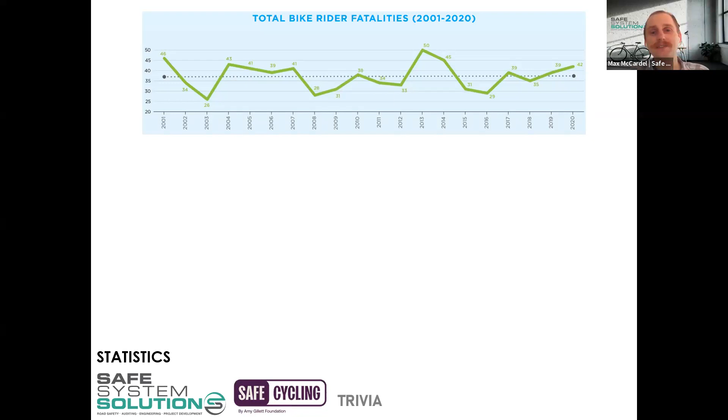This is just showing how the fatal trauma for cyclists, riders, has been performing over the last two decades, so the last 20 years. And we can see that there has been a bit of a cyclical up and down, but that dotted line represents the trend line. And you can see it's relatively flat. So there's not a significant amount of movement.

Over the last 20 years, we've basically been seeing 40 or so cyclists killed on the road network every year across Australia. And that's been pretty consistent, which is pretty disappointing to hear. If we compare that to how we're tracking with vehicle fatalities, in the last 20 years we've certainly seen lots of investment in road safety programs across our jurisdictions. And we have seen lots and lots of benefits with our reductions in trauma for passenger vehicles,

so for those that are driving cars. If we do this as a measure of the actual population size as well, we do see that for rider fatalities, or those people riding a bike, there is a downward trend there, but it's not as steep as what we're seeing for vehicle fatalities. So in other words, yes, as a percentage of the population, rider fatalities are decreasing, but not to the same extent as we are seeing for vehicle crashes.

So there's certainly some work to be done within that space to see greater parity between those two road users, and hopefully seeing much better numbers, so we're not just always hovering around that 40 deaths per year for riders.

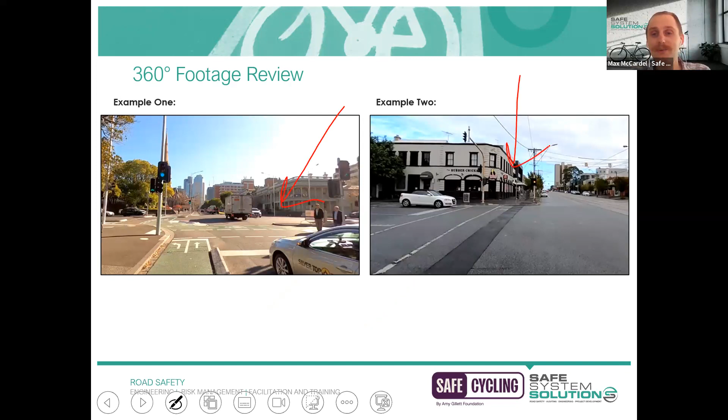Okay, hopefully everyone managed to watch the video footage from our last module where we had a look at the protected intersection, as well as example 2, which was just a conventional intersection and using the hook turn box. Love to hear feedback in the chat.

Today's agenda will very closely follow what we had structured in our previous module. And one of the documents that we do refer to quite often is this guidance on bicycle and pedestrian treatments at roundabouts. It's 2016, so it's a few years ago now, but there's still very relevant findings in there. Lots of good information. And we've also got the bicycle safety at roundabouts, the Austroads research report.

I think I mentioned this in module 1, where if Austroads is commissioning a research report, it tends to show the volume or the significance of that issue. So the fact that they've actually said we need to know more about cycling safety at roundabouts, and they're willing to put X amount of dollars to fund a research project, really exemplifies that there's a pretty significant risk here and something that we can do better within industry.

And one of the ways that we can do better within industry is through the implementation and design of protected roundabouts. I will go into exactly what that looks like and the design elements of a protected roundabout. I'll show some international examples and then have a look at something that's a bit closer to home that would look a bit more familiar, and that's Melbourne's protected roundabout.

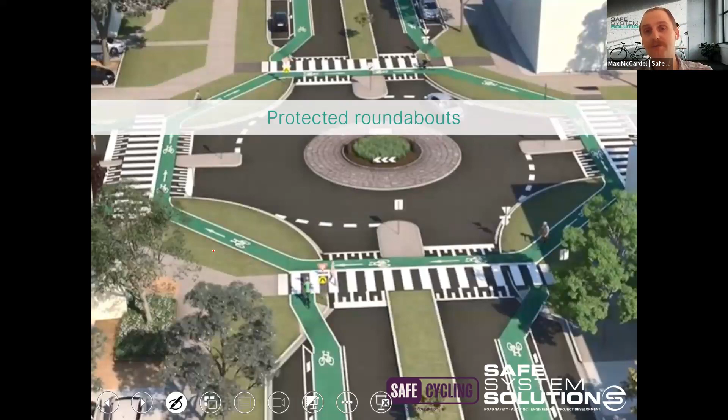Alrighty, so this is an artistic rendition of Melbourne's protected roundabout. And the first thing that you may notice is that the bicycle facility is kept away from the circulating area. So you're not forcing riders to coexist with traffic in the circulating area. One of the really critical components of these protected roundabouts is getting your riders away from that circulating area. And we'll discuss why you would be wanting to do that in just a moment.

The other thing that I really like about Melbourne's protected roundabout, and it's not a requirement of these features, but where the conflict point exists at each leg of the roundabout, they've actually raised those conflict points. So we know that where we've got raised crossing points, we have a much better chance of actually slowing vehicles down and making them yield, making them give way.

If that was just at grade with the circulating area and with the carriageway, and riders had to go down onto that carriageway level, there's a bit of that priority confusion once again, who gives way to who. So really, really good practice to raise all of those legs and award priority to your vulnerable road users, which is your pedestrians and your cyclists. So I'll talk more about this with Melbourne's protected roundabout later on, but just wanted to give you a high-level view of what that one looks like.

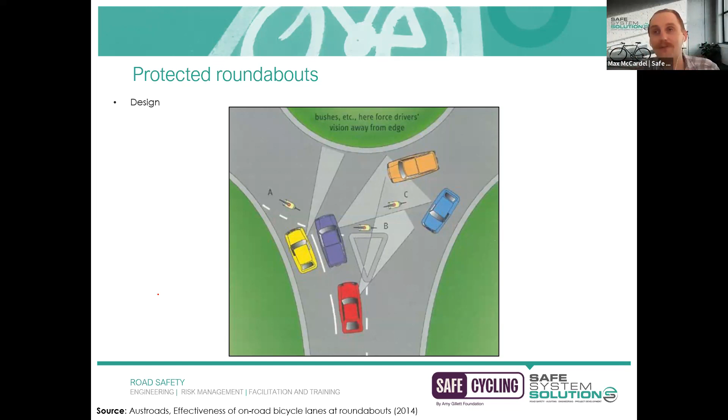A few years ago now, there was an evaluation completed which looked at police crash reports of bicycle crashes within roundabouts and did a bit of an analysis around what the crash types occurring within that roundabout were. So what were the type of movements? Now, this is a bit of a synopsis just to give you the high-level summary of what that evaluation concluded.

So that is exactly what I explained before, that phenomenon where a vehicle may look at a cyclist but fail to register them and just enter the roundabout. And that's where you've got the collision. So quite a significant amount of the trauma is occurring with those types of crashes.

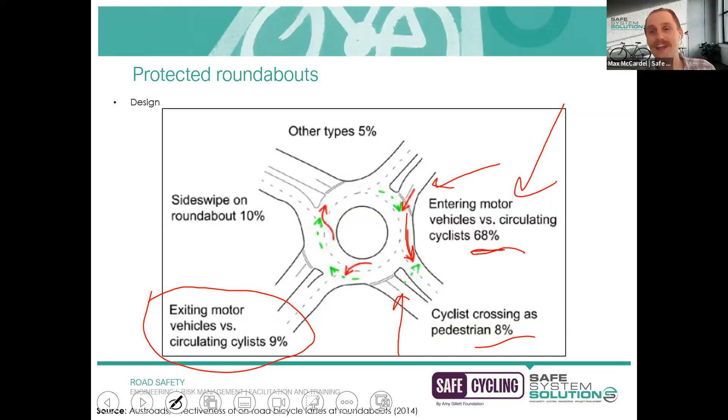There's actually an example in today's 360-degree video where I'm riding through a roundabout similar to what's shown here, and I'm doing a right turn. And if you flip the camera kind of behind me, you can see a vehicle that's going through, and you may be able to appreciate that level of tenseness and how awful it feels.

Anyway, the last one here is a side swipe within the roundabout. So a vehicle that is basically failing to stay within the traffic lane and could be veering into the bicycle lane. We have lots of bicycle lanes on the periphery of roundabouts, which we'll talk about later. And that's at about the 10% mark. Another 5% were just other, meaning that they didn't have enough information to make a decision on how to categorize this, or just other random accidents that occurred.

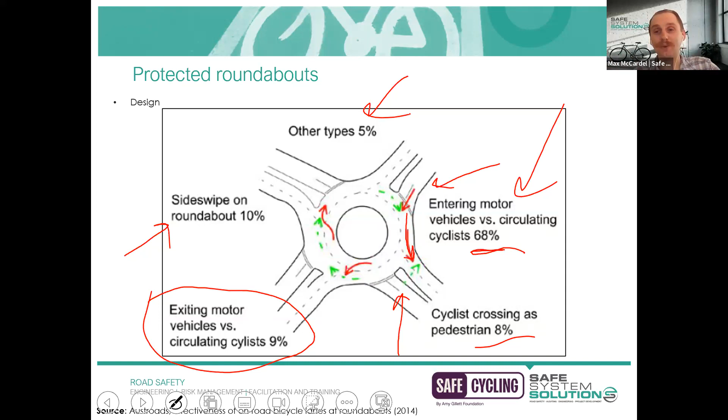Okay, so that's just to set the context of our roundabout journey. So we understand that there's pretty significant trauma occurring here, and we understand what types of crashes are occurring. Now, how do we go about mitigating that? What design solutions do we have? Well, one of them is, of course, grade separation.

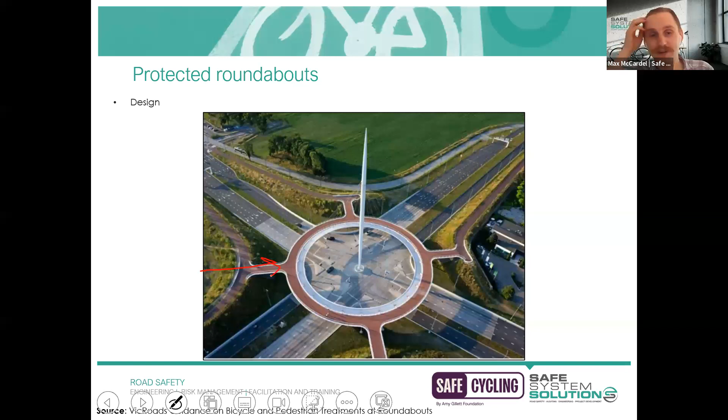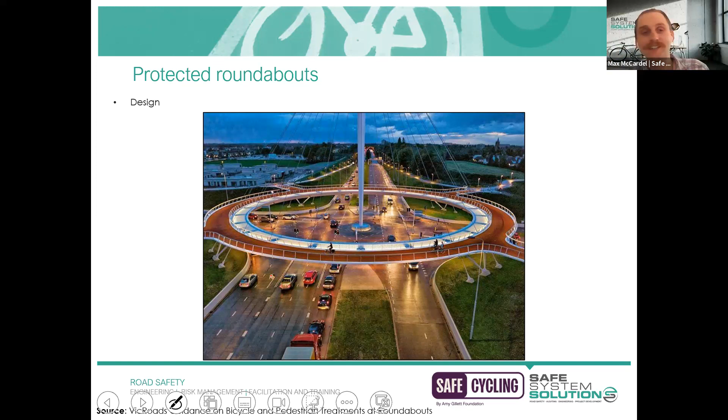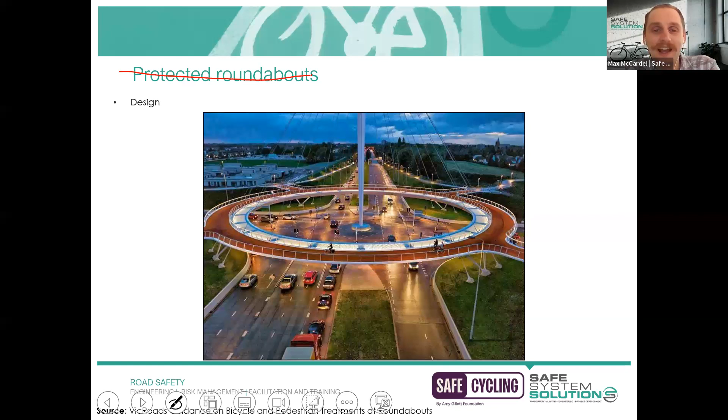If you've ever got the money to do Hovenring, I suggest you go for that, but that's not actually an example of a protected roundabout. That's just grade separation. I'll talk about protected roundabouts, which are a little bit cheaper than what's been shown there. So this is, I guess, a general arrangement of what your protected roundabout may look like.

As I mentioned before, what we really need to be affirming as a core objective is getting our riders away from the circulating area. So we're no longer forcing the cycling community to get into that area where we know there's so many different types of crashes that can occur, and we're seeing lots of trauma. Instead, let's not even bring them into that space.

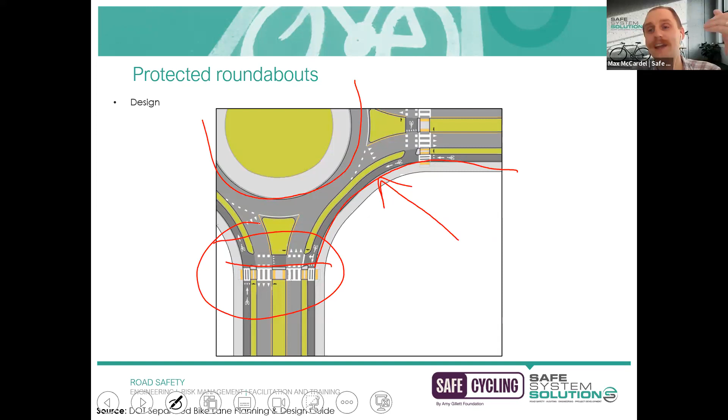Let's take them away, get them offset from that circulating area, cross at a very defined, discrete location, and preferably award priority to your riders, just so you've got that continuity of services. And also, as I mentioned before, best practice is raising where that conflict point is. So you're slowing down motorists and increasing the likelihood of motorists actually yielding and giving way to your riders as they cross there.

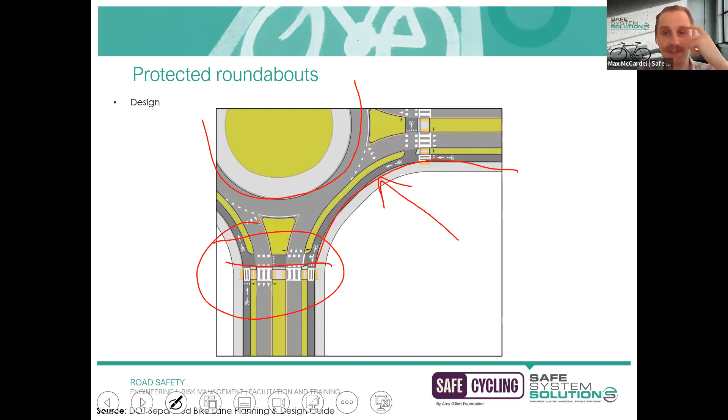Okay, I've got this little diagram as well, which shows the key points that we spoke about. So we've got number 1 here, which is our cycling crossing points. Similar to what we talked about with our protected intersection, you do want to keep your pedestrians and your riders separate at these locations, rather than just use a shared facility. Just because of the speed differential there, it's a good idea to separate those vulnerable road users. Number 2 is yield lines.

Basically, we wouldn't use that shark tooth line marking there, but give way pavement marking, so vehicles are aware that they have to give way to pedestrians and cyclists that are crossing at that location. This one I'm going to cross out, which is bicycle stop line. So you would either do one or the other.

You wouldn't do both. So we would be recommending that you force general traffic to yield where that's appropriate, and let your riders have the right of way going across the carriageway. But you certainly wouldn't do both of them, because then you've got priority confusion. So just be mindful of that.

Number 4, 5-foot curb radius. Don't need to worry too much about that. Number 5 there, I wouldn't say is essential either. It's just creating that physical separation between pedestrians and riders. So it's not just one shared area. You've got 2 clearly demarcated zones for your different users there.

All right, I will hop into some international examples now. Before I do, though, I will just check in with Ainsley and Marissa to see if I've missed any questions. I'll jump in with a quick one, Max. Not sure if you know this, but have there been any studies on crashes at protected roundabouts just to see how the stats do compare to traditional roundabouts?

A very good question. So we, as in Safe System Solutions, did evaluate the effectiveness of Melbourne's protected roundabout. And we got all of that data beforehand, prior to installation. Post-installation, I don't have the exact figure at the top of my head for crash reduction, but I do have some other figures within this presentation, which I'll include later on. So I can dig that information out for that person that's interested.

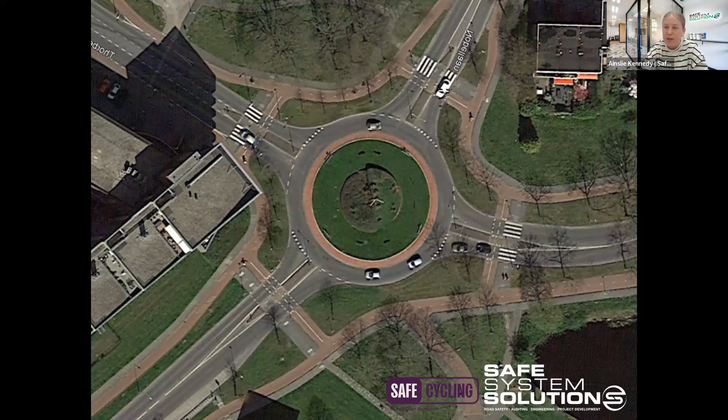Perfect. Thanks, Max. And then a bit more just a general point rather than a question. Catherine has said in the chat that it is a great design and it could be used retrospectively on improving cyclist usage and safety in a more local roundabout environment, which I think we will dive into a little bit further on, but also a great point to make.

Yeah, so you probably wouldn't see these being used in multi-lane environments or arterial or anything that's really busy. Certainly Melbourne's is in a local environment as suggested. Just because as you get multi-lane roundabouts, you get the issue, as I talked about in the previous module, of dynamic visual obstruction, where one vehicle blocks the sight lines of the other, and then you just can't see any cyclists that could be crossing there. So they don't tend to get used in those higher capacity roundabouts. That's really when you'd be hoping for grade separation.

Thanks, Ainsley. Thanks, Max. No worries.

So I've got an example here, and I'm going to spend a bit of time now going through some international examples. This one is in Assen in the Netherlands. And what we've got here, for those who may have already noticed, is quite a large, generous footprint. So there's actually quite a lot of space involved in constructing this particular protected roundabout.

Now, just as a demonstration, if you were riding from the bottom of the screen and wanted to turn right, this is actually an example of a bidirectional protected roundabout. So there's a few ways that you could do this. If it was just one direction, you'd probably have to do something like this. But because this is bidirectional, you've got this opportunity to cross in a much more convenient manner, something a little bit quicker to do.

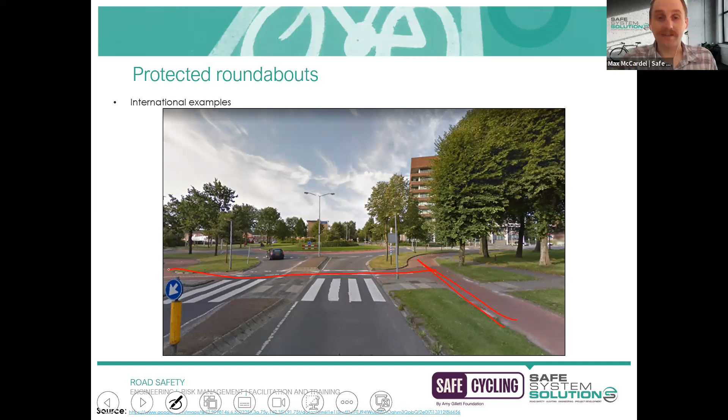Marissa. Max, Lucas just identified that the paths look very close to the building. What are the impacts to the path and offsets when you have a building on a zero setback? Right. Yes, it does look very close. It could just be this particular aerial.

I mean, it probably is built right up to the edge of the property boundary, so right at the edge of the road reserve there. And if you don't have the setback, I guess you can run into issues with the actual landowner there and things like maintenance and all those types of implications.

Or if there's any protruding, overhanging cantilever structures and things like that, there can be other issues. But I wouldn't say they're showstopper elements. I think they just need to be worked out on a case-by-case basis. And yeah, there's a good point there. It could potentially have sightline issues if you do have physical structures or lots of vegetation adjacent to that property boundary that could impact on sightlines.

And with all the sites that we'll show, it just demonstrates using what land you do have and trying to maximize the efficiency of your design. So I've got other examples that show exactly how you're trying to get the most out of what you've got as a footprint.

Thank you very much. So the other thing I wanted to mention about this one is, because it is so large, you can see what I will just call the offset, or this distance here, which is the edge of the circulating area to where the conflict point is, or where riders are crossing over. So a relatively large space there. In this example, it's about 2 vehicles long. You can actually see it on the other leg there as vehicles are entering.

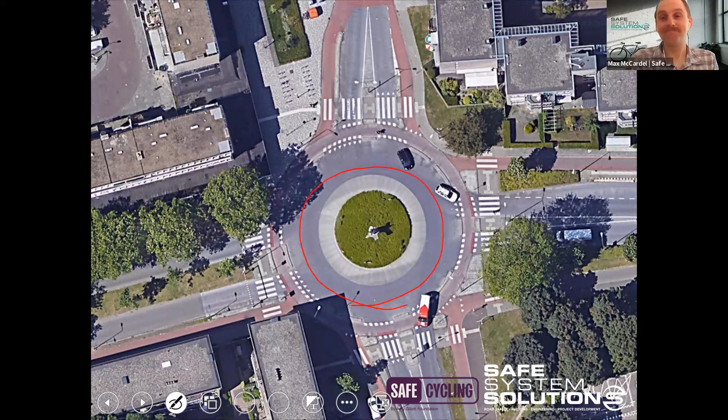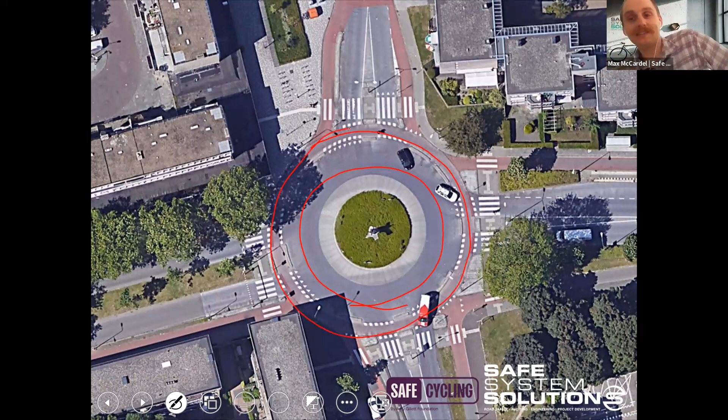So here's another example in a more confined, constrained environment, much more urban. This is in Rotterdam. And you can see we've got our circulating area here for vehicles. And then directly adjacent, an outer ring, is where the riders would be located. Now, this does mean that riders don't have as far to travel. In the previous example, with that right turn, you saw that it was quite circuitous. In this example, it's basically as close as you could get without physically entering the circulating area. So it's more attractive in that sense.

But previously I showed the benefit of having further offset distance was improving your sight angles. Well, this is the other side of the coin, where very conveniently in this aerial image that I took, I've got a vehicle that is exiting the roundabout, and I can also see a rider as they're coming around here. Now, as you could imagine, if you were in that vehicle, to twist your neck backwards and see a rider in that spot there, or perhaps even closer, it's actually very difficult.

And as I've said before, you really want to ensure that you're maximizing your sight angles, sight lines, so it's as easy as possible for vehicles to see any of those conflict points and be able to yield to them. So the closer you bring your bicycle path to that circulating area, the more this sightline angle becomes a bit of a risk.

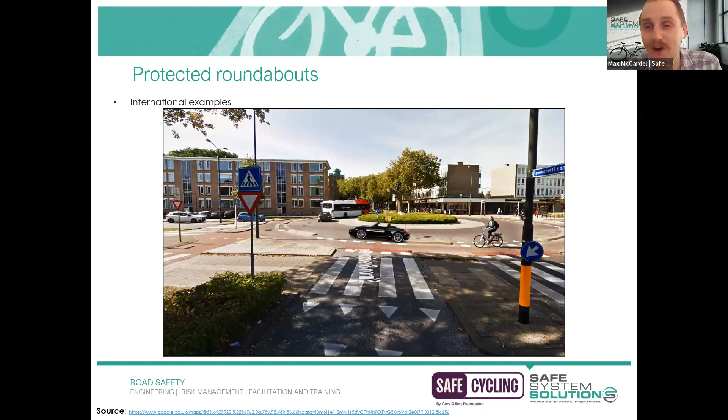So just to reiterate, I'll show this on the ground as an example, and I might bring in a little car, a little Porsche number. And if you put yourself in the perspective of that Porsche driver, and let's just say they were exiting at this leg, very, very challenging for you to be able to see the rider that is kind of on your passenger door side, unless you've already made eye contact with them prior to the roundabout.

But in saying that, you may have also assumed that they were hopping off at that leg. You may have assumed that they've gone somewhere else, or they're slowing down or something like that. So there's a whole raft of reasons why the driver may assume that they're fine to exit that leg. But because of this configuration, the way that it's set up, it's actually quite difficult to make that eye contact with the rider as they're crossing over.

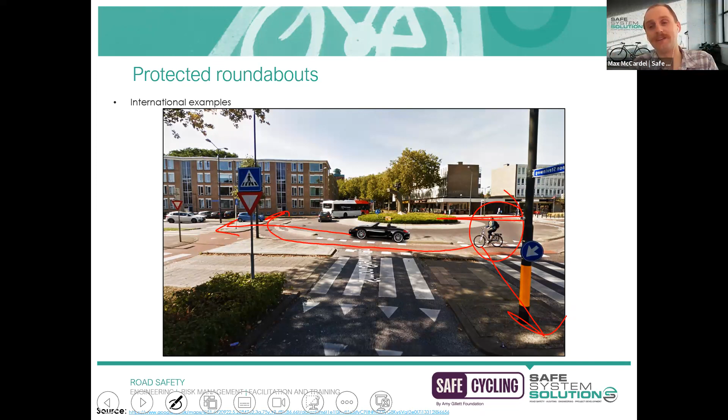So this example is one where you've got a much more constrained space, and you don't have that offset between where the bicycle path is crossing and where the circulating area is. So we saw one where there was a big one, and this is a small one.

And this is like, I can't remember what that child's story is with the 3 bears, and this one is like just right, something like that. I don't have kids, in case you're wondering.

But this one is kind of that happy medium, I guess. This is Fendon Road, which is in Cambridge in the UK. This was opened in 2020. And Cambridge has done wonderful things over the last few years about creating a real cycling hub of activity, and being one of those pioneering cities that have really embraced cycling infrastructure. This is the way that we want people to get around. Probably helps a lot that they've got such a strong university population there as well. So people are probably more inclined to get on the bike.

Anyway, this is an example where it's not as large of a footprint, but we're also not going as close as possible to the circulating area. Instead, as I mentioned before, what I think is a good rule of thumb is basically trying to get one vehicle stopped on the exit leg so that they're not going to be blocking the circulating area. And that's probably a pretty happy medium, where it's not going to be too far away and detract cyclists from using it. It's not going to be too close where you're going to be impacting on sight lines, but you've still got a better case scenario for both of those examples.

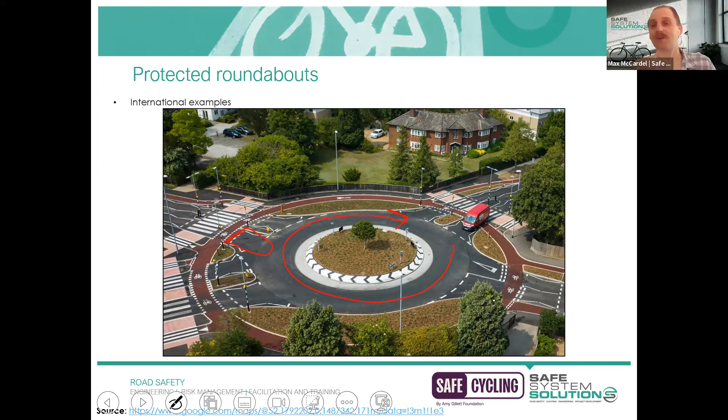Now, just to show you what this one looks like on the ground as well, you can see as these riders are crossing over, this motorist here is in a much better position to be able to sight oncoming cyclists. So they're no longer at their passenger side door where they could be in the blind spot. They're basically crossing in front of them, and it's just a much easier opportunity to see that conflict point. So being able to yield.

All right, what I'm going to do now is I'm just going to play this video, which is a protected roundabout in use. And this is just going to loop a few times so you can have a look at what this actually looks like at an operational level. And as this plays, I'll check in with Ainsley and Marissa to see if we've had any questions.

I can jump in with a couple of questions, Max. So one that's just come through is, would it be better to have signals at a roundabout where ped and cycle movements are high? So yes, there have been examples of using metered roundabouts. I know there's quite a big one in Melbourne, just on, not Punt Road, Alexandra Road. And yes, they can certainly offer benefits for pedestrians and cyclists crossing there.

But there can also be disadvantages with that as well, whereas the protected roundabout kind of offers that continuity, that flow for riders, because they've basically got right of way as they're crossing at all of those features. With the signalized, you could potentially have the issue of riders forced to do right turns and stop multiple times to get their phases, which can detract from that particular feature. But to be honest, I'm not really sure of a study or any research that's actually gone into a lot of detail about how that could potentially offer significant benefits.

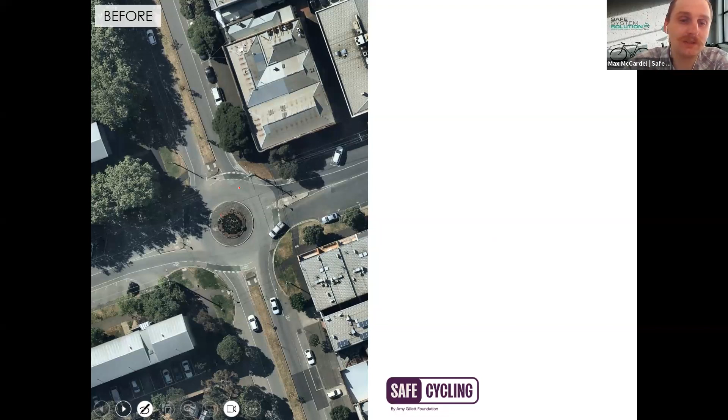And we've got an aerial snapshot of how things looked before the introduction of the protection. What was previously installed was these bicycle lanes, which existed on the periphery of the roundabout. We've already spoken about why we don't like to see our riders in that situation. Vehicles may assume that they are going through a roundabout or turning left when they could be turning right, and you've just got these awkward sight lines and the conflict points and conflict angles. So this is what was previously installed, and this is how things look today.

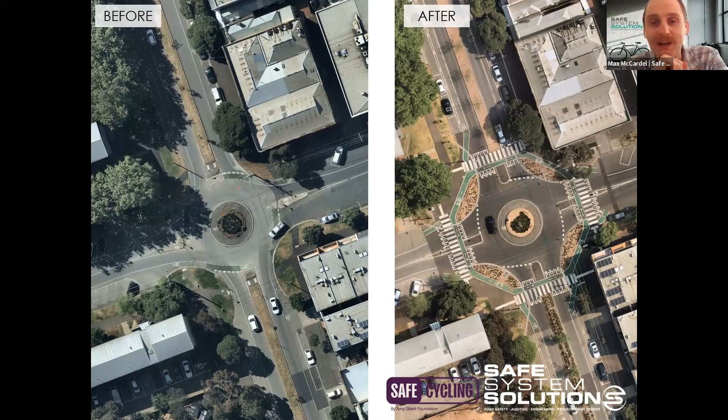I might just zoom in on this after image because I'm going to focus on this for the moment. One of the things that you may notice is the shape of the bicycle path. You've got this, is it octagon? 1, 2, 3, 4, 5, 6, 7, 8. Yes, octagon shape, which some people really, really hate. Some people are completely oblivious that it's actually shaped like that until I mention this, and then they go and ride it and they're like, oh yeah, that is weird.

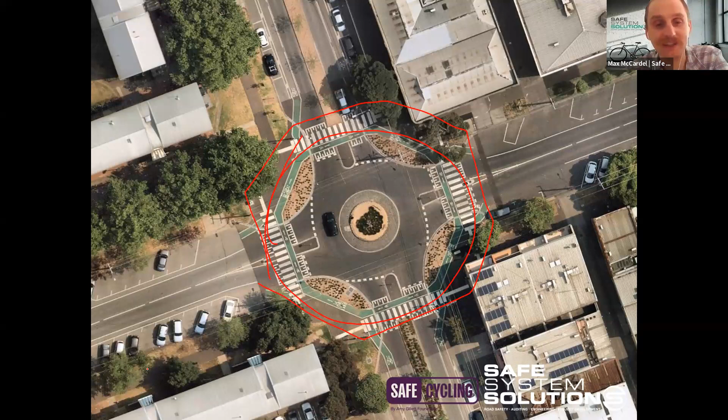It is obviously a lot more comfortable if you are riding to use smooth curves. So if you could do an outer ring with one radius, that is a more comfortable experience. In saying that, personally, I don't think that the angles within this design are particularly terrible. It's just, yeah, some people find it very upsetting.

But a question I wanted to throw out to the group, so get ready to type your answers into the chat. I have spoken about all the wonderful benefits associated with the protected roundabout design. But looking at this image, is there anything that you can deduce that could be perhaps a disadvantage or something that is not very attractive for riders using this facility? So I'll give you 30 seconds to have a think about that.

All right, I can see lots of very good answers coming in. Queuing of the traffic, absolutely. Giving way to peds is an interesting one. I understand that kind of concern there. I do actually prefer this than riders being given right of way over pedestrians, because I think it's much less likely for pedestrians to yield to riders than the other way around.

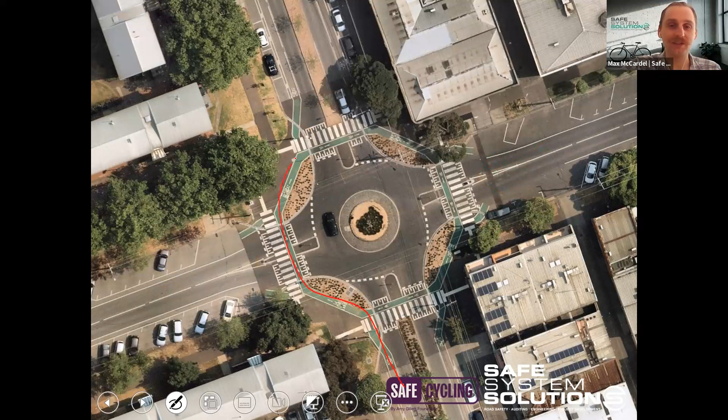All very good points. The one that I'll give a prize out to Marissa, and I do agree with everything that was said there, but the one that I had in mind in particular was the longer journey time it is for right turn. I spoke about that previously, but it's particularly relevant in this example. So basically, to turn right using this facility, you'd be doing that kind of movement, whereas previously you would have just done this.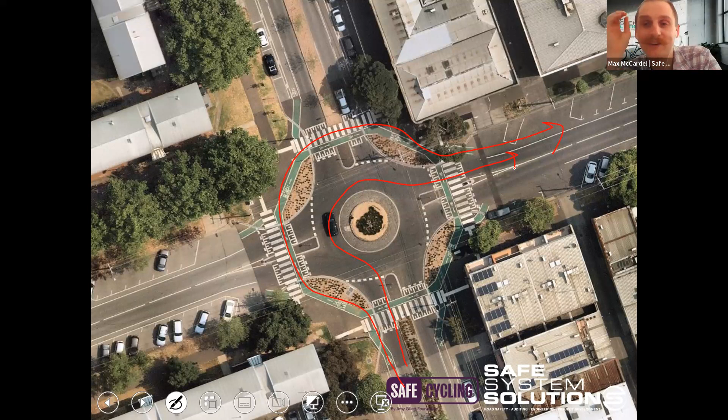And of course, looking on an aerial and drawing this with my finger, the difference looks fairly negligible. But as you're riding, it can be a little bit of a nuisance to go out of your way, particularly if you don't understand why those types of features have been installed or what's going on there or how to use it. And so to some extent, some people do deliberately just not use that.

And that's exactly what this next slide was showing, which, basically, some people are either not aware of how to use this roundabout or don't want to have to take that more circuitous route. As part of the evaluation study that we did for this site, we did some counts to see how effective the different movements are in attracting different cyclists. We got about 91% of riders that were traveling through this location did use the protected facility. So 91%, if you're going through, used the protected facility.

Pretty good. For those that wanted to turn right, that statistic went down to about 77%. So if you were turning right, the rest went, nah, I'm not using that, I'm taking the circulating area, which some people see as a bit of a failure on the project, that we should have expected 100% compliance, every rider using the protected roundabout, because that's where we've got the safety benefits.

But I don't tend to think of it quite so negatively. I think we've got that diversity in skills that we've talked about many times within the riding community. Regardless of what you implement, I think people will make their own risk assessments and ride what they think is the most suitable or what they feel most equipped to do at that point in time. So I'm not particularly disheartened by those statistics. In fact, 77% using the safer facility, I think, is pretty awesome. And also, though I don't have the statistics here, there was an increased participation on this route as well, showing that more riders were using this as opposed to the alternatives within the area.

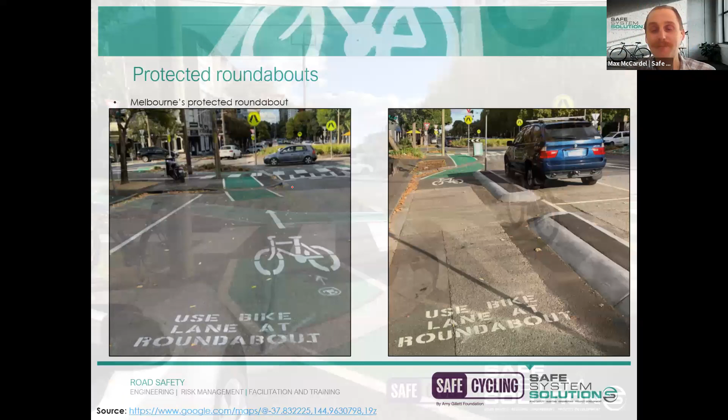If, however, you were in an environment where you really did want to corral riders into it, where we actually do need to see 100% compliance using the protected facility, well, I'll give you a bit of a snapshot of how things look on approach to these legs. One of the legs is just a stencil with a bicycle symbol and an arrow, and just says use bike lane at roundabout. And I'm sure, as you could appreciate, if you're a rider, it's just as easy for you to go that way as it is that way. So it doesn't necessarily do that much.

Similarly, with the example on the right-hand side, this other leg that we're seeing here, if it was your project objective to get much higher rates of compliance for using the protected facility, you could literally just block the separation all the way up to the circulating area.

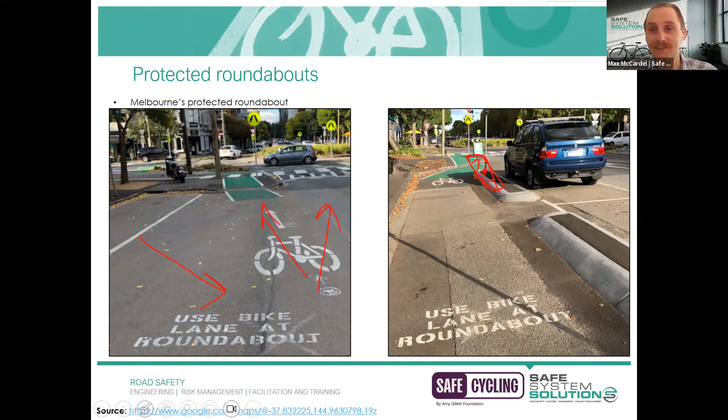So if you really wanted to do it, you could, but it's probably going to be more inconvenient for you to access the circulating area. So you could just include that curb and channel all the way up to it. But even then, it's unlikely you're going to get that 100% compliance. So it's probably not the most useful measure there.

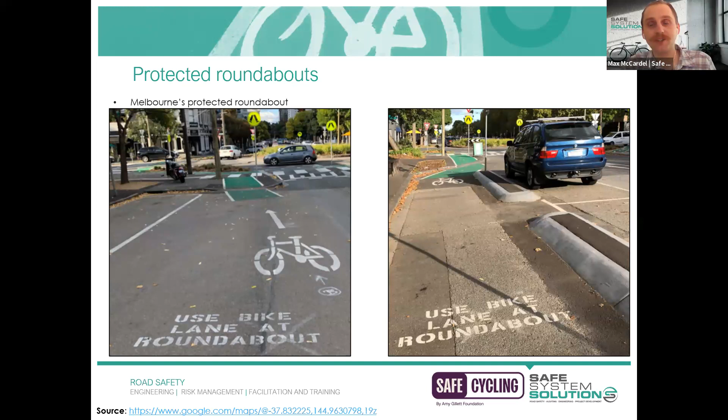Feel free to keep the questions coming in. I'll get stuck into our next module now, which will be talking about multi-lane roundabouts. I've got a wonderful example of one just here. And these are much more precarious situations for riders within this environment. This particular site was randomly selected, but there could be any multi-lane roundabout with riding facilities on it that looks something similar to this, and you could just do the exact same risk identification that we're going to be doing here.

But I will just start by saying I'm going to be focusing on a rider that is coming from the right of the screen. So it kind of looks like a footpath there, but that is actually a kind of raised cycle track or off-road facility where riders are encouraged to position themselves. And as a rider is approaching this roundabout, the first thing that you may notice is the actual facility gets narrower and narrower.

It gets squeezed. Now, the reason that's occurring is because some swept path design would have taken place and a heavy vehicle would have been used as the example. And it would have noted that the edge of that heavy vehicle follows that path that I've just crudely drawn there, which so happened to mean that the bicycle lane just gets narrowed, which is automatically not such a great thing. You certainly want to make your facility width continuous, particularly as you are entering these kind of high risk scenarios. So this is not a good example at all.

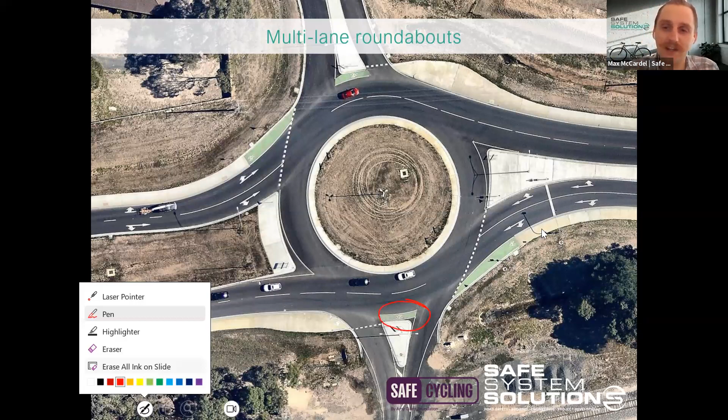The first would be riding along here and then dramatically stopping, slamming on the brakes and picking a gap in traffic, crossing over there, again stopping, picking a gap in traffic, and then completing your right turn there. I should just clarify, there's no curb ramps at this location, so there's nothing really that would promote that movement, but that is theoretically one way a rider could perform that right turn movement there.

The other way a rider may perform a right turn movement, which is probably more common, would be staying in this lane here and then crossing over like that. Now, hopefully immediately you can see the risks associated with that because it's basically turning right from a left turn lane if you were in a vehicle. In other words, you've got a through vehicle crash that could occur there and a through vehicle crash that could occur there.

Super, super precarious. And once again, both of those crash angles are not conducive to good sightlines. If you were riding, you would have to be looking back over your shoulder and seeing if there's a gap before making that decision to turn right there, which is certainly not something we would want to be encouraging, but does occur within these environments.

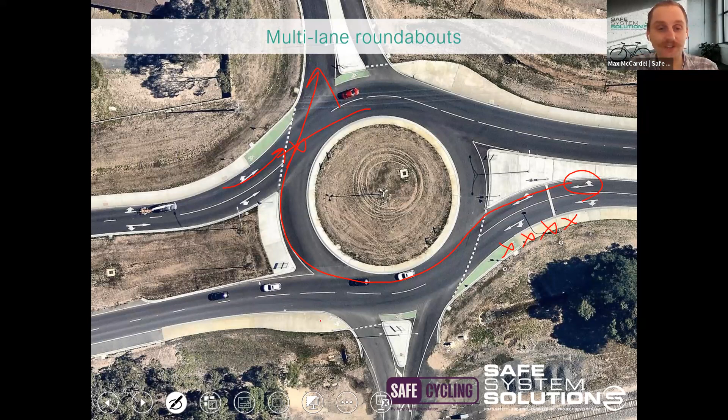And that then leads into, well, you have to get over to that traffic lane, so that's going to be uncomfortable. And also it's just got that same risk where motorists that are in this position ready to enter the roundabout may not expect to see a rider or may not cognitively recognize a rider there. And so we've got that fail to look, see. Anyway, a few different scenarios there, all of which are not very conducive to safe movements for riders.

Just to show you what this one looks like from the ground level. It's a bit clearer to see how that bike lane really does narrow on the approach, which is very strange indeed. And you may have noticed in the previous image that there was a stop line there. That's that solid line there. That's a stop line. And in this image, you can see that there are some signals.

Fortunately, that's got nothing to do with the cycling infrastructure. It's just there's a rail line there, and that's for the boom gate. So when those boom gates go down, vehicles aren't turning left to then potentially block up the roundabout. Anyway, just wanted to show you that.

Hopefully you can all appreciate why all of those right turn movements are not at all safe for a rider, and having that facility there is just really not doing much for attracting diversity in cycling or providing a level of safety for cyclists. I should have also confirmed that this is quite a high speed, high volume road as well. So this is 100 km/h or 80, so it could be 80. It is a rural environment, but just on the outskirts of a rather large township.

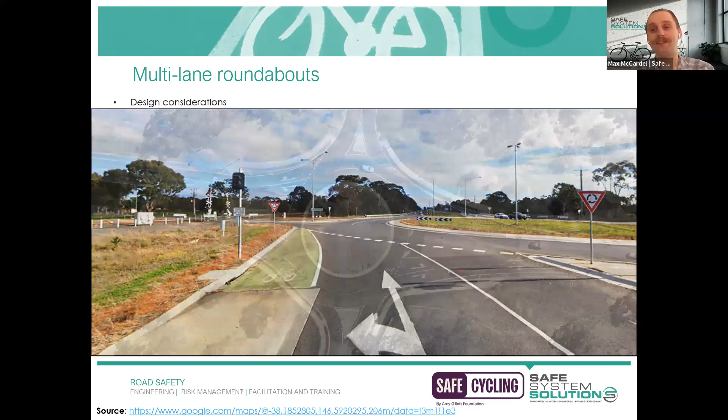I'm going to compare that to something that we can have a look at. This is in Canberra, and as you can see, it looks very, very similar to that other example, just in terms of how the carriageway configuration looks. It's very, very similar. The cycling connectivity is dramatically different. So once again, I'll focus on that right-hand leg just for consistency.

And we've got an on-road facility that gets taken off-road. So there's a bit of a passage, there's a curb ramp that really encourages riders to take this as this is where you should be going. Don't head towards the circulating area, but it doesn't necessarily say that they couldn't do that. Anyway, a rider comes through this off-road facility and then they get moved around and away from the circulating area once again.

At this location, there is a hold rail, or one of those kind of U-bollards, which is basically an area where riders can stop. They've got something to grab onto. That's particularly relevant for any riders that use cleats on their shoes, because then they don't have to unclip and try and stand up. It's just a lot easier to grab a hold of something. So very good idea to include them at these crossing points.

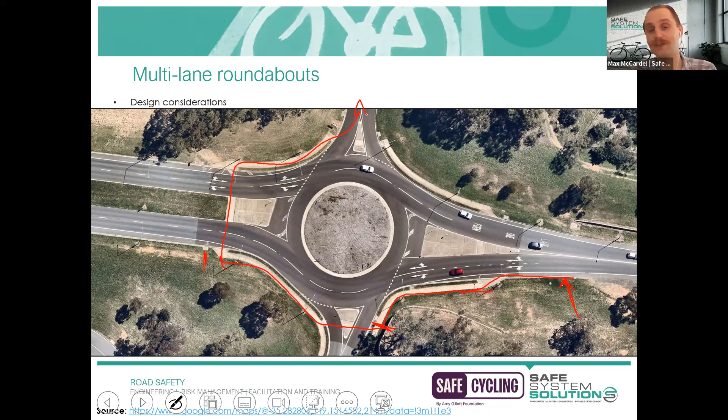So now, of course, as I did mention, whilst this off-road path does corral riders into using that facility, it's once again not like that is exactly what you have to do.

For those riders that don't want to do that, you could certainly access the through traffic lane or push across to the right traffic lane and perform your movements from there. So it does still provide those riders who are training, for instance, that they are able to maintain those speeds. But those that just don't feel comfortable doing that, they do have this ability to position themselves somewhere that's safer, where they can make more conscious decisions in those areas.

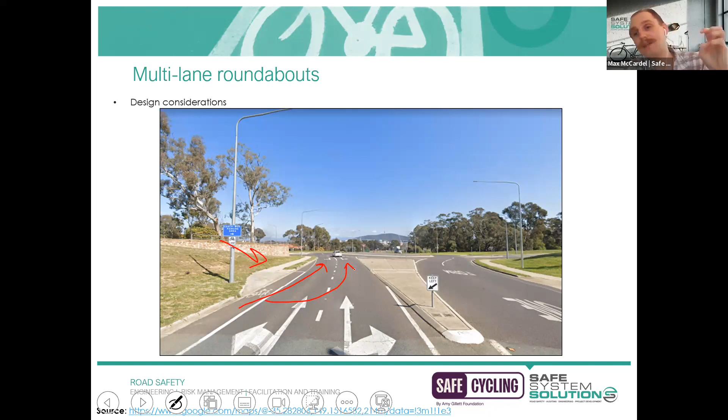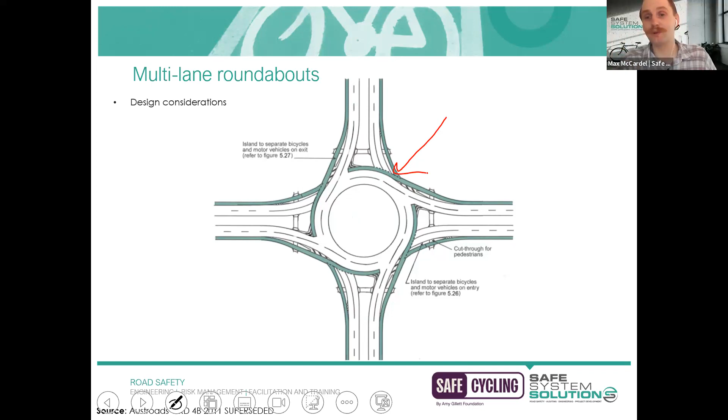So we'd much prefer to see this as an outcome as opposed to just seeing the bicycle lane being used in the periphery. In fact, for anyone that has seen this figure, this one used to be incorporated into the Austroads Guide to Road Design Part 4B. It's been superseded. In fact, it's no longer in the guidelines at all. The reason being is we just no longer encourage putting bicycle lanes within the circulating area of multi-lane roundabouts. It's far too risky. We don't like to do this at all. So this has been deleted from our Austroads guides.

The reason I include it here is because you may have hard copies of these papers. So just make sure if you do have any of those lying around the office, just get your big red marker and say this has been superseded. And then you can also just say, Max told me to do this. That's completely fine. Because we're no longer recommending that as a treatment. It's just not a safe outcome for our riders.

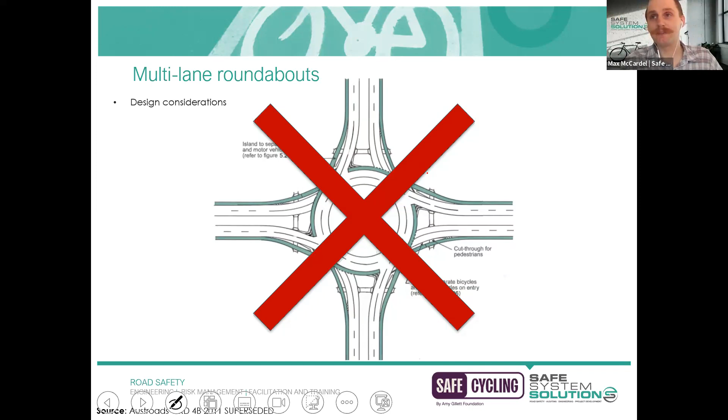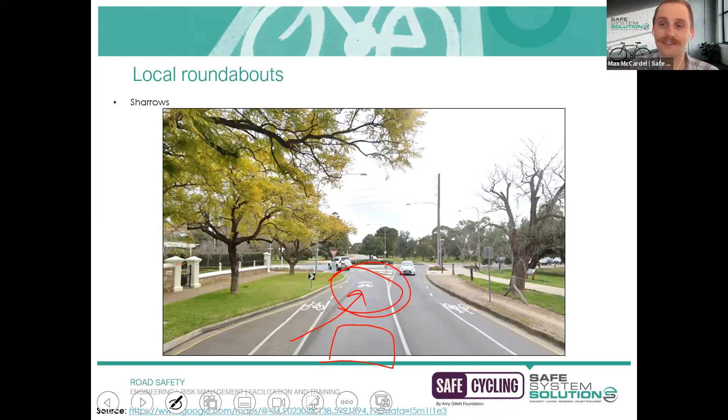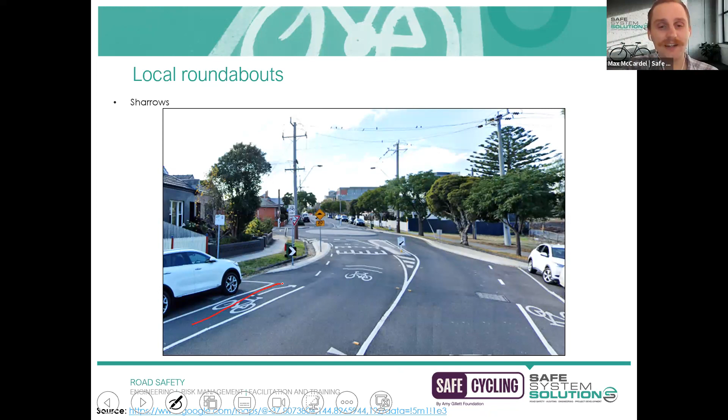We already spoke about the dimensions and things like that for sharrows. I've got a few examples of what that traffic calming could look like. In this example, it's not a perfect example because you can see that the bicycle lane kind of ends, and that's the sharrow treatment, and then you've got the speed cushion. As I mentioned, ideally, you'd want to be bringing this feature back prior to that merge point, so you've slowed down traffic before that conflict point exists. It means they're much more likely to slow down within the roundabout, and if there was a collision, vehicle speeds would be much lower, so we don't have the same level of severity.

And I'm not sure if Ken covered this within the module 2 course, so I will just repeat this. If he did, feel free to interrupt me and say, no, we know this, that's okay.

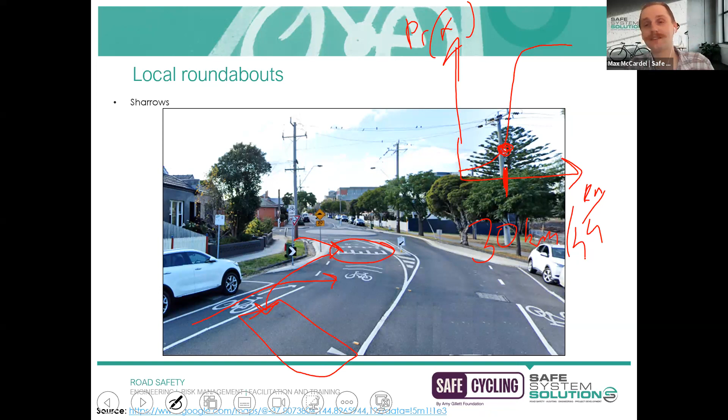So this is the vehicle impact speed versus a cyclist and the probability of a fatal accident occurring. And the speed that this occurs is about 30 kilometers per hour. And the reason that I'm encouraging this is because whenever we do have our conflict points occur, so if we've got any merging occurring where we could have a rider being struck, we want to bring those vehicle speeds down to 30 kilometers per hour or lower to significantly reduce the risk of a fatal incident occurring there. So keep that in mind as you're doing any of those designs, because that's a useful figure to reference.

Another example here of just that traffic calming being used on approach to a local roundabout. So once again, riders are being encouraged to take the traffic lane, and also within the roundabout itself, there's additional sharrows being used so that they take a very prominent position within the traffic lane and they're not just riding within the periphery. Really, the only times you'll be doing this are local roundabouts. So you don't have the space to be doing protected roundabouts. You can't grade separate because we don't unfortunately rain money in this country.

So you're just looking at lower speeds, and well, I can put in a few speed cushions on each of the approaches. So hopefully bring down those speeds and make it more comfortable for riders to access the traffic lane and feel like they can perceive that that's a comfortable and safe thing for them to do. Okay, before I get stuck into some education campaign things, I will check in with Ainsley and Marissa to see if I've got any questions.

I think you clarified it right at the end there, Max. There was just a question about when sharrows should be used in terms of if you can do a protected roundabout. Of course, that's our first option, and then sharrows are an option for a little bit later if we don't have the space for a protected. And then there was another point which I think you clarified as well, just about should an additional sharrow be installed in advance of the merge point? Yeah, okay.

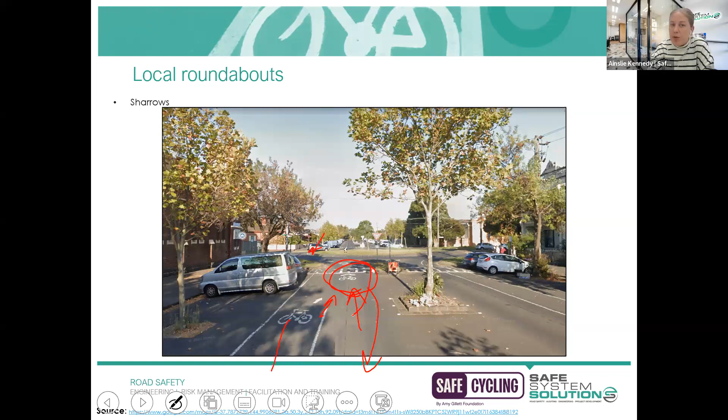Yeah, perfect. And another one which is a little bit more general, can be for intersections as well. But is it possible to only treat particular legs of the intersection rather than all of them, if you know what the primary route of the riders is, and then also if there's budget constraints or other issues like that? Great question. Give a prize out there, Ainsley. Yes, I think that's a very, very reasonable thing to do.

Particularly, as you say, if you've got the primary strategic cycling corridor, or your cycling highway is running north-south, and there's only local residential access east-west, it may be cost prohibitive to be doing significant upgrades at each of those locations and each of the minor legs as well. So instead you focus your money on where the significant volumes are, or where you've planned for your significant volumes to be. And that's also particularly relevant if that cycling treatment is only on one side of the carriageway. So then you may actually only be treating minor legs, say on the western side of this corridor, and everything on the east would remain the same.

So yes, I personally think that you could be focusing your infrastructure improvements to where your cycling corridors are going, as opposed to every single intersection needing to be consistent. And in fact, the video that you'll watch as part of this module shows a protected roundabout, but only one of the legs has that protected facility. The other legs do not. So it's a real tangible example of that in practice.

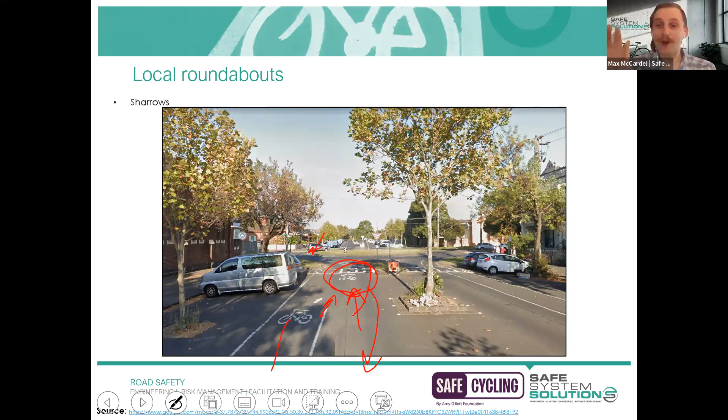Great. Thanks, Ainsley. I'm going to hop into some educational things at the moment, purely as an acknowledgement that infrastructure and engineering can do wonderful things to improve our transport network. And we definitely know that, we've got studies and evidence to back this up. But we do have to acknowledge that we're working within a society which has lots of different views on the cycling community, on cycling as a means of transport.

And we do rely on other avenues to help spread our positive cycling commitment. And that can be things like campaigning, creating little adverts or media, or even as humble as talking about how excited you are about a new bike path that's going in at your next barbecue or things like that. Just creating that nice positive attitude around how good cycling is, I think, does go a long way.

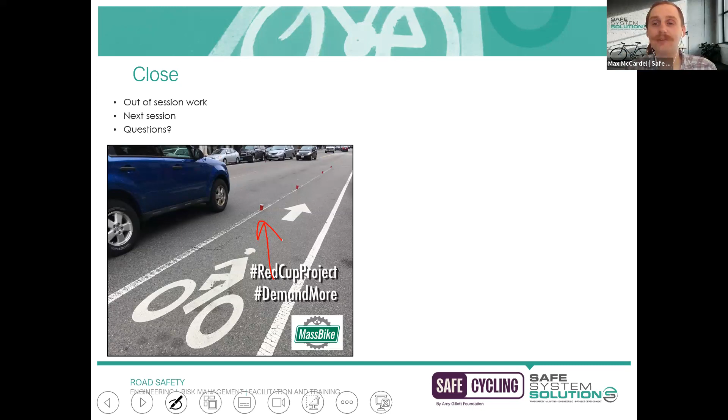This happened several years ago now. This was the Red Cup project, which was trending on Twitter. Basically, lots of different riders around the globe went out to their bike lanes and popped red cups at the edge of their bike lane, took a photo, and then a few hours later took a photo of how that cup survived, and invariably the cup was squashed,

really to demonstrate that just using paint is not enough to demarcate the space, and also to show how vulnerable our riders are and how regularly general traffic are using the bicycle lane as they're performing turning movements or overtaking. So this one did become quite a big trend. We had examples of this occurring within Australia, New Zealand and parts of Asia.

Some people decided to put tomatoes or apples inside their cups as well, just to add to the theatrics. I love a bit of theatre, so that's pretty exciting. But it's nice to see that little community-based activism, I suppose you could call it.

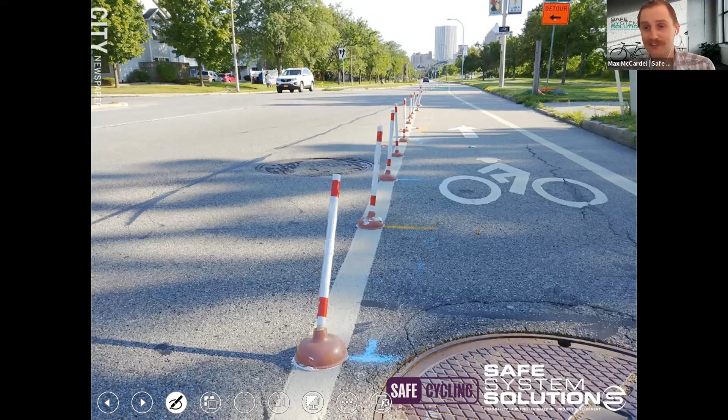This next one always gets me, which is a fellow in New York who had been advocating for a long time to get a separated, protected bicycle lane on his road to work, but council kept knocking it back, so he decided to take matters into his own hands and went to the local warehouse store and bought himself 100 plungers and some epoxy and just started gluing them down at pretty regular intervals.

And I've got to say, he did a pretty good job. It looks like he also spray painted it all out just to make it nice and neat, nice regular intervals. So you've got to appreciate the quality of that. Unfortunately, this vigilante's enthusiasm was not met with the same positive response by council, and they did in fact rip it up. And to my knowledge, this is still not a protected lane, so he didn't manage to achieve that objective. But there you go, just a fun little example.

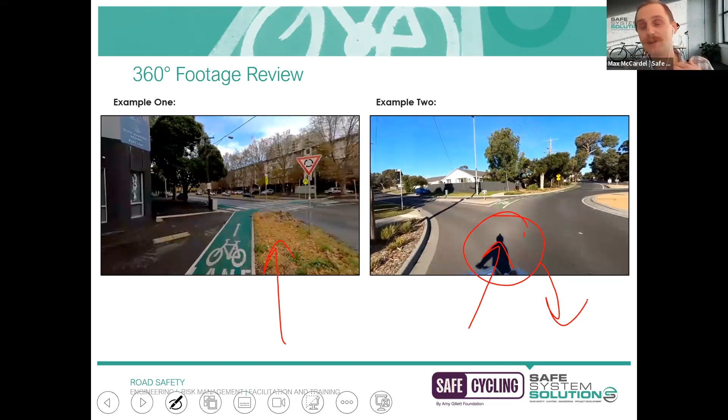Okay. As I've talked about a few times now, we do have the final 360-degree video footage for you to review. There are two examples. One is riding through the protected roundabout within Melbourne. The second one I spoke about before is riding through a more conventional roundabout. And as I said, when you're going through this one, have a look behind you and have a look at the vehicle that's oncoming there, because you can try and appreciate why riding in those environments feels so nervous.

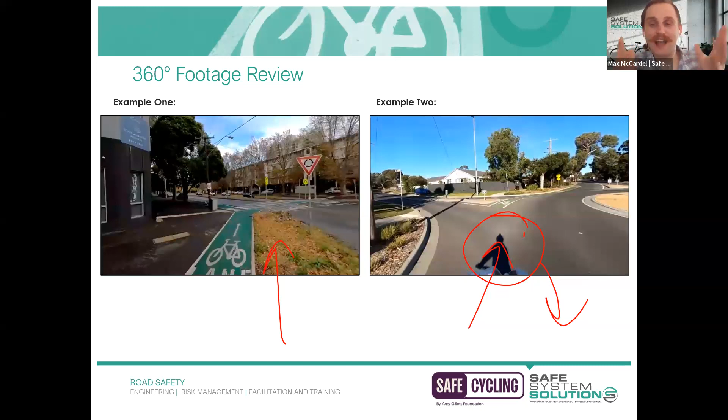There's also a third example at the end, so make sure that you stay on all the way to the end. It is a longer video, that one. I think it goes for like 10 minutes or something. But anyway, I've left a bit of time at this session because I do need to spend some minutes now going through the final assessment piece, which is an assignment. And there's a few different paths, I guess you could call it, or a few different ways that you can do this assignment, which is why I just wanted to spend some time right now to chat through it. And you can just ask me your questions while we're in this environment and hopefully sort out all the details.

So our LMS, I really hope this looks familiar by now. We've got that 360-degree video that I just mentioned, so you can watch that one. We've got this letter to LGA template. You can click on that and download it. I'm not going to open it up just yet, but you can have a look at that. And then you've got this module 4 assignment.

And if I click on the module 4 assignment, there's a single document in there. I note that if you are from Transport for New South Wales, we've noticed that some of you seem to be having issues with uploading your submission. So please give it a go first and see if it works, but if it doesn't work, just email it to us. But everyone else, please just use the LMS. It's just a lot easier for us to coordinate if it's all done through here. Anyway, module 4 assignment. I've got both of these documents up, so I'm just going to open it rather than download it again.

The module 4 assignment involves you actually analyzing a real site, and it's a site that you get to pick. Now, you can do step 1 first, or you can do step 2 first. That's up to you. But what we want you to do is pick a site that has existing cycling facilities. So that could be an on-road bike lane. It could be a shared path. It could be a protected bicycle lane. It's your pick. Something where there's bicycle facilities.

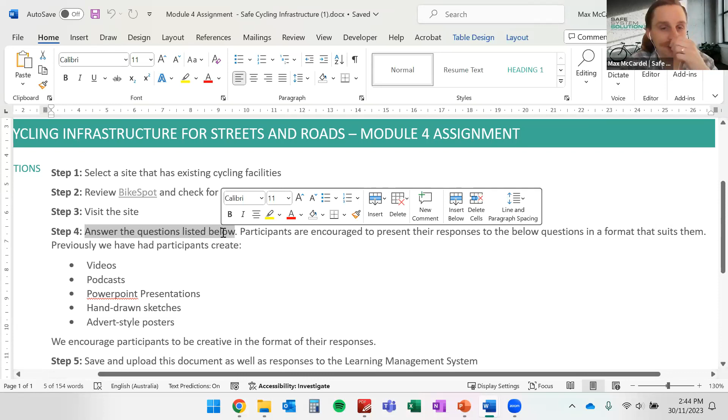Now the fun part begins, which is we've got some questions that are listed below. And I'm just going to skip straight ahead and go to these questions. And these questions are, what infrastructure currently exists? What are the hazards for cyclists? And what could be installed to better improve the safety for cyclists? And what we need from you is we need you to clearly articulate responses to each of those.

Once again, what we are actually marking is your ability to use the correct jargon, so the correct terminology, and also identifying the hazards. So we do ask you to include a link of the site that you have inspected, so we can just do a quick check to see if you've noted all the relevant hazards, or would we have picked the same hazards? So we want to make sure that you've got that ability to actually identify what those hazards could be, and then mitigating solutions that could improve the safety for cyclists. So what treatments or infrastructure would you be recommending? So those are the 3 questions we want you to answer.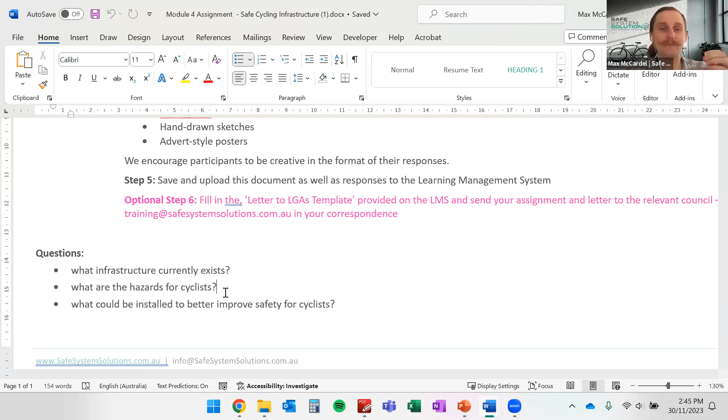Now, if I go back up to step 4, we say that participants are encouraged to present their responses to the below questions in any form that suits yourselves. So previously we've had people do TikTok videos, we've had people write poems, we've had people do artwork, we've had people get their children involved and they've had like a little play, or we had a storybook recently, which was just divine. Some people just love the opportunity to be creative, and we want to encourage that. So if you've got a means that you like to express yourself in, we're all for it. We just want to see you answer those questions.

Of course, if you want to just answer them in a Word document, or you want to do it in a PowerPoint, that's completely fine. You're not marked on your creativity. It's just an option for you. So if you want to do something a bit wacky, we're up for it, but we will just be marking you on the answers that you respond and not the creativity.

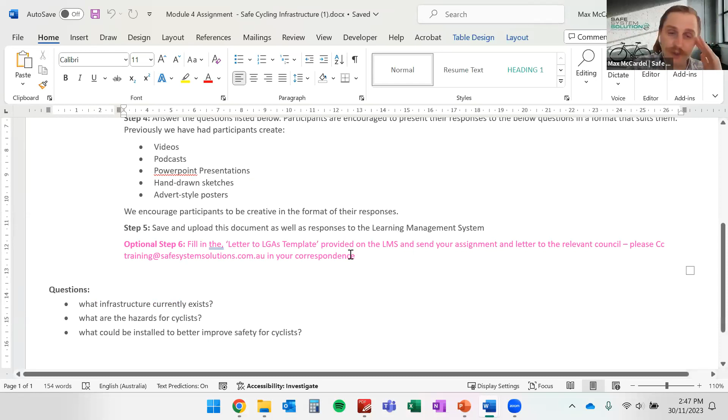Save and upload this document as well as the responses to the learning management system. That's where you just need to make sure that we've got your responses saved and the location that you picked. And this is an optional step that we've included in pink here, which is fill in the letter to LGAs template, which was the other Word document I briefly mentioned, and send your letter to the relevant council or road authority. We ask, if you are going to do that, just please CC us, the training team, in, just so we've got a record of who's doing this, just for our own interests.

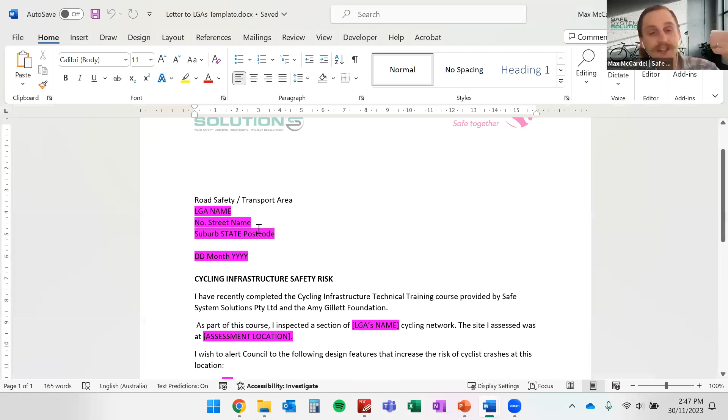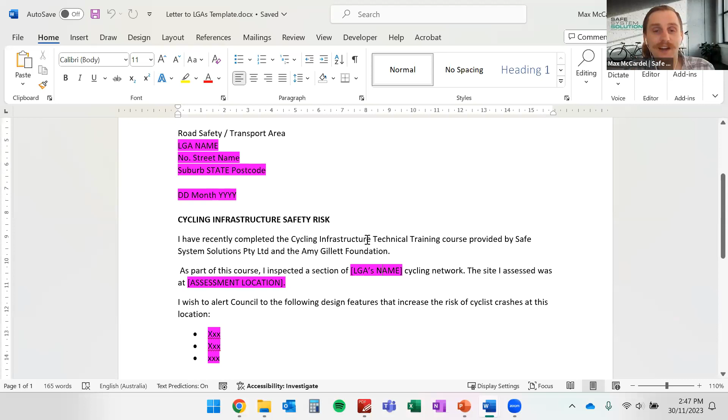To show you what that letter is, it is pretty straightforward. You would need to fill in only the sections that are highlighted in pink. And all it says is, I have recently completed the cycling infrastructure technical training course provided by Safe System Solutions and the Amy Gillett Foundation. As part of this course, I inspected a section of Frankston City Council's cycling network.

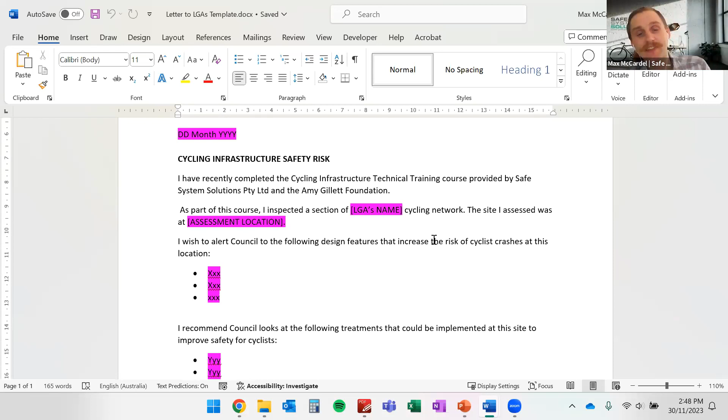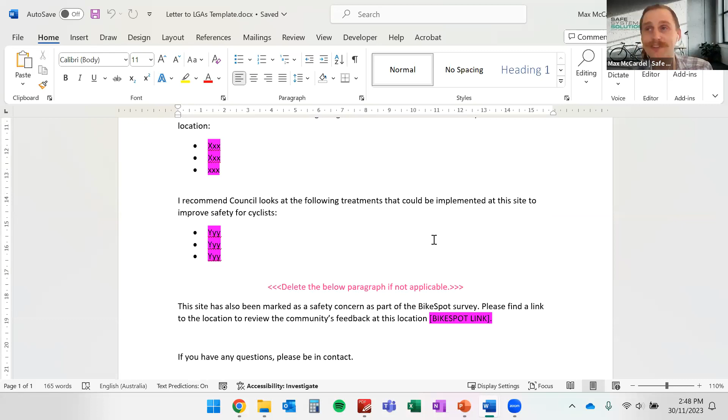The site that I visited or assessed was at Overton Road and Nepean Highway in Frankston. I wish to alert council to the following design features that increase the risk of cyclist crashes. And that's where you can just copy and paste from your assignment. And I recommend that council looks at implementing the following treatments to improve the safety. And once again, that can just be a copy and paste.

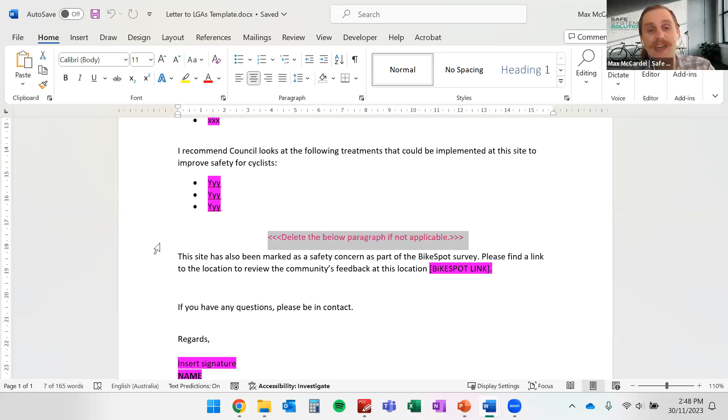The following paragraph may be deleted if it's not applicable, which is just if you've had any community pins being dropped as part of the BikeSpot thing, you can just put a little link to the BikeSpot, and that will help to give a bit of evidence to why you're suggesting that there's issues at the location. And then we get you to sign off and just put your details and things like that.

You do not need to do this letter. This is not part of your assessment. We've just found that some people involved in this course do like to go on and actually advocate for that change. And they're just like, well, I've done all this work to say what's wrong with it, and I would like that to be in the hands of someone that could potentially do something about it. So it's just a template there for those that are interested. But by no means are you graded on that component. So take that in mind.

And also appreciate that some of you may be in the LGA that you are actually reviewing. So you're potentially addressing a letter to yourself, which we've also had people do. So yeah, don't put that. You can do that as well, I guess.

I hope all of that assignment was clear. There's a few other bits and pieces I wanted to get through, but I'll just double check with Ainsley and Marissa if there's anything I missed about the assignment. I think we're all good for the assignment, Max. You've covered it well. There hasn't been too many questions coming through. That's great. That's very positive to hear.

So I'll go back into the LMS then, and there was just another little sneak peek thing I wanted to show, which is under the resources tab, under reference documents and resources, we've actually got a file in there which is called Cycling 360 Footage Examples. And you open that one up. Whoops. And it is a PDF document which has 360-degree videos of different types of cycling infrastructure.

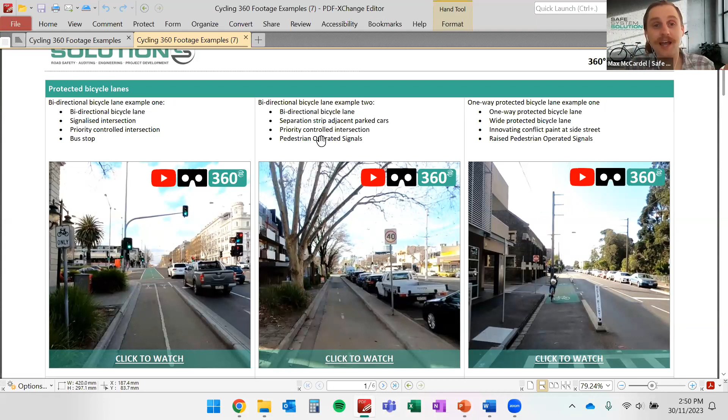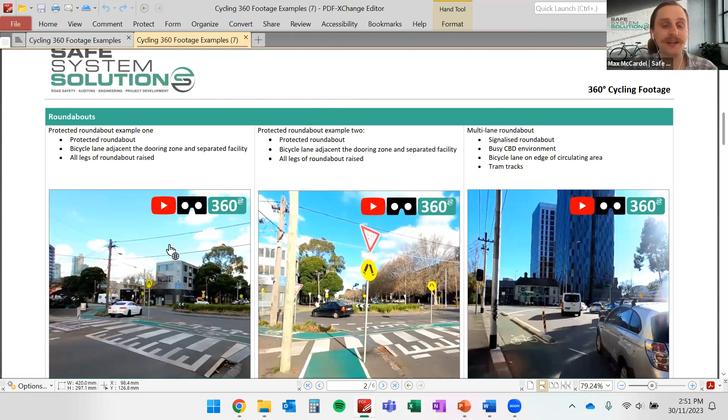So if, I don't know, a year from today, you forget exactly what a protected bicycle lane or a bi-directional facility or what a protected roundabout looks like, we've just given you this as a tool so you can be like, oh yeah, that's what a protected roundabout is. You click on that, it'll take you to YouTube and it'll show you what it feels like riding through that facility.

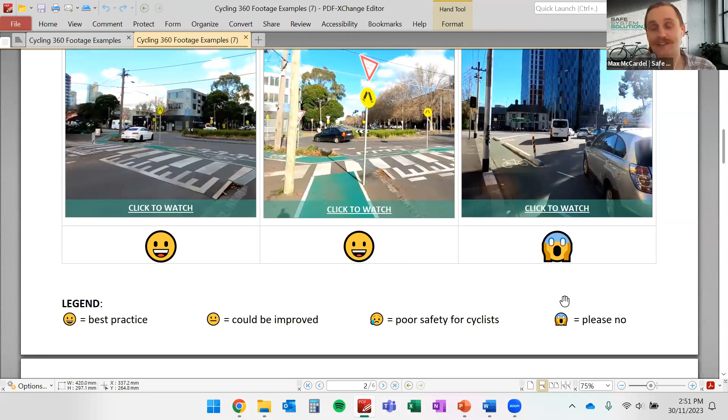We also just did it for a bit of fun. We added some emojis. So you've got a bit of a legend about what we would consider good stuff, or what could be improved, or things that we just definitely don't recommend and don't want to see more of. So I think if you're going to watch any of them, I'd just do the ones that are please no. So you know exactly we don't want to see any more of this. Yeah, and it'll give you appreciation.

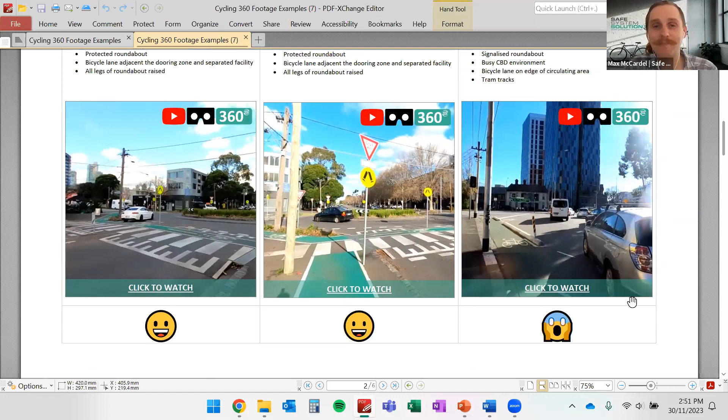So I'd really recommend you download that one, save it on your local drive somewhere, just keep it on your desktop, because no doubt you'll have to refer to these things, and it's very handy to have this as a bit of a reference document for you.

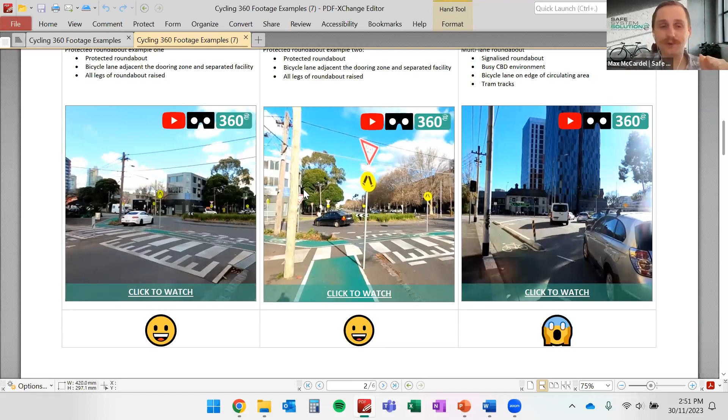So that's the resources. To finish off this course, right down the bottom, we've got a feedback and certificates section. We do have a short feedback section. So that's just an opportunity for you to reflect on how you found the course. We're very, very responsive on these things. We like to ensure that we're giving everyone the best experience that we can provide. So we don't take these things lightly. So please do provide your honest feedback, as it will help with our future editions of this course.

We've also got this little folder here, which is, I told you I've got lots of random things to go through. We've got this folder here, which is share your achievement online. And if you click on this one here, this is basically for anyone that would be interested in sharing that they've completed this course and they've got the certificate. We've basically done a bit of a spiel about what this course is. You can copy and paste that as your post.